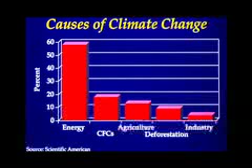And we look at causes of climate change, and we find, as we well know, that energy is indeed the primary contribution. So even if this were not an energy conference, if I were just talking to you about climate change, its dangers, and what we can do to meet it, I'd start talking about energy policy. It's where we are. Okay? So this is out of some publications I've had, and I'll just show you one of them in a moment.

But what we've tried to determine is, on the left-hand side, at what percent of the world's energy use has to start coming from clean, non-carbon energy sources in order to limit the growth, ultimately, to 550 parts per million of CO2. Now, there have been all sorts of work around that as to different policies. That's what all those little colored things are. I did superimpose the U.S. policy. There it is. So you realize that the United States has no policy. It's not doing anything whatsoever to contribute to setting a limit.

So let's look at this picture again, and let's look at it this way and try to make it easier. The green line says, well, it's a little hard by 2010 to get going as fast as we want to. So let's consider 10% renewables by 2010 and 20% by 2020, and then get up to 50% by 2050. And that is the target that's been adopted by the European Union now, that's been adopted by a number of states and cities, because it's so easy. The 10, 20, 50 target: 10% by 2010, 20% by 2020, 50% by 2050.

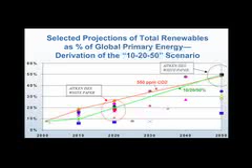The reason I'm showing it to you is when you see targets like that, people will say you're just drawing these numbers out of the hat. No, you're not. That is the target. The 10, 20, 50 are the targets that can stabilize us at least fairly close to where we think we need to stabilize. Those are real numbers. Okay? And the circles, the most aggressive ones, came out of my own work that I did on a paper that was paid for by the European Union. And I'm going to show you in the next slides why I'm confident that we can meet those aggressive targets.

This was the paper called Transitioning to a Renewable Energy Future. It has its own web page, a little hard to see at the bottom, but it's just whitepaper.ises.org. You'll find it in Chinese, Arabic, Spanish, French, German, and whatever you might like. Try English. All right? And this is what comes out of that paper and some others that I've published this year.

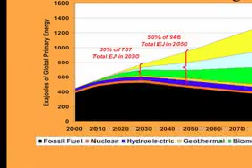And that is, all right, in order to turn that corner for the 10, 20, 50% usage pattern, what does that mean for our energy usage between now and 2100? The black is the fossil fuel use. It says we've got to turn that corner. If nature doesn't turn the corner for us, as Richard is suggesting it may do, we ourselves have to have turned that corner by 2025 or 2030. So now you begin to see why everybody's targeting toward 2030. That also is not a number drawn from the hat. It's a real policy number that's necessary to accomplish this stabilization.

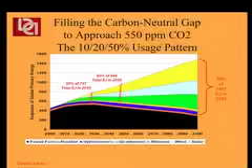And all the colored things you see represent the amount of energy that renewable energy will have to contribute if the world keeps growing on its use of energy. And we assumed a 1.2% annual rate of growth for the world on this, because we don't believe we can level it yet, even though there's no question efficiency, as Richard and Stephen and everyone point out, is the starting point. And so we have to ask ourselves realistically,

can renewable energy be developed fast enough to meet all of those colored lines that you see there and really power a transition even if energy use continues to grow? So here come the practical opportunities with renewable energy. I'm going to dwell first on electricity because it's the easiest to deal with here and has the greatest number of resources. Just to remind you that all we really want to do with electricity, to make electricity, is to turn that generator you see on the right-hand side.

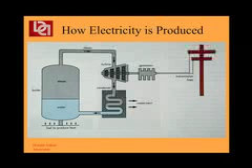That's all you're trying to do. Everything else you do is to spin that generator. So the way we do it with fossil fuels or nuclear, of course, is you boil water, you make it steam, the steam turns the turbine, and the turbine turns the generator. So then we ask ourselves, all right, can we do this without burning fossil fuels? Can we look for natural ways, natural sources of steam or ways to make it?

Well, we've got one just north of San Francisco, the world's largest geothermal power station. The fellow Channel 2 interviewed me a little bit before. I hadn't realized. He's rather new to Channel 2 and he didn't know about this.

The amount of electricity that's created by the Geysers geothermal power plants just north of San Francisco is equal to the electricity that the whole city of San Francisco uses. Now, it goes into the PG&E grid. It doesn't all come to San Francisco. But the point is, that already is a local renewable energy resource which by itself is equivalent to the demand of our major city out here.

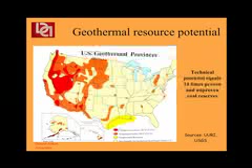It begins to suggest that we've got large opportunities, and indeed if we make a map of it, there are the geothermal resources. People will look at that and say, well, obviously, geothermal's in the west, it's not really going to help provide for the energy of the entire country. But if you look at that resource, the technical potential is 14 times greater than all of our proven and unproven coal reserves. So what you begin to see as you look at these renewable energy resources is the potential is gigantic. Well, let's look on.

You can do what they're doing dramatically in Europe with combined heat and power, making steam by burning biomass energy crops, in particular chipped wood, for example. And our president even mentioned in his State of the Union address, he still can't pronounce nuclear, but he did pronounce switchgrass correctly, and I was amazed he mentioned that. Yes, indeed, we're paying farmers right now not to grow crops on land that's erodible, so they're growing switchgrass to keep the land from eroding.

You can harvest the switchgrass and dry it and throw it into your coal-fired generators. You reduce the sulfur, you reduce the energy content, reduce the coal content, and clean everything up. There are a lot of things we can do with that. Or farmers can grow biomass hybrid energy crops. This happens to be in northern Minnesota. You can plant these crops. These trees take about 10 years to grow.

You cut them about 6 feet above the ground. Another 8 years, you got another tree out of the same stump. You cut it. Another 8 years, another tree out of the same stump. You can get a 40-year crop out of one stump. And it has farmers doing what they know how to do on land that we would not otherwise use for growing food.

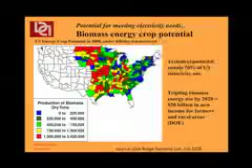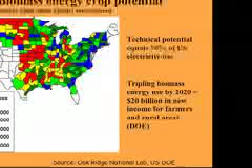So we ask ourselves, assuming we don't want to displace any food land, what resource potential do we have using biomass crops? And the technical potential is that we could create 70% of the U.S. electricity just from the residues on the fields and from the residues in the forests and so on. Again, a huge amount.

Another way to do it, as we just saw out here, there was a nice demonstration actually of a parabolic trough collector which was concentrating on the black pipe that he had out here. You can make bigger ones and concentrate more, and you can go to high temperature fluid. Then the fluid goes to water, flashes the water to steam, and makes electricity just the way we know how to do it. The world's biggest and longest operating solar thermal plant is in Southern California. Its capacity is 1/3 the size of a nuclear power plant. It's been going for 20 years, and there's a magic thing about it. Right in the middle of it is a gas-fired power plant.

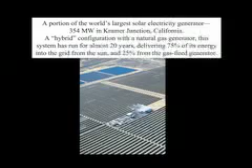The contract with Southern California Edison is that starting at 7 o'clock in the morning, SCE wants their full amount of electricity, whether the sun is shining or not, and they want it flat all the way till 7 o'clock at night. And so what they do is they turn on the gas-fired power plant. As the sun comes up, you back down the gas, and the sun takes over. As the sun goes down, you go back up with the gas, and you have a hybrid marriage between solar energy and gas. And the hybrid saves 3/4 of the gas.

20 years experience has now shown us that the gas only needs to give us 25% of the energy, and the sun will do 75%. When people talk about the transition as, well, we'll stop using fossil fuels and we'll start using renewables, that's not what we're going to do. We use fossil fuels to help power the transition, to help make it more attractive, to level our intermittent resources. There needs to be a marriage with gas to reduce the demand on gas, since we're really not going to be able to meet it, and to increase the value of the solar.

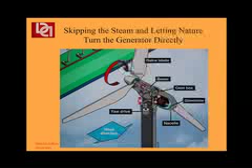Or we can skip all that stuff. Skip all that making the steam. Figure out some way just to turn that generator. And a very nice way is to put those wind blades up in front of it and let them turn, and it turns the generator, and that's not a new technology. And this is not DOE's new R&D program either. This has been around for a while.

No laughs out of that.

That's all right. Previously we used it in order to grind grain and things like that, but now we use it to make electricity. And I don't know how many people realize that California pioneered the world wind industry when Jerry Brown was governor, and basically said, let's go for it. And at the beginning it was a tax dodge, but it got it going, and Denmark picked it up and started making better machines, and all the rest has been history. But we pioneered the world wind industry. That has come a long way.

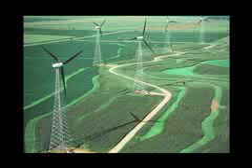The coal industry likes to say the renewable advocates are going to be taking tens of thousands of acres of land out of farming to put the wind turbines in. They actually still write that. They forgot to tell the farmers. So the farmers didn't know that they could go on farming the land, and so they went on farming the land, even though they had the wind turbines.

And in fact, what we have learned, and it was alluded to earlier, is having wind, the annual payments from your wind turbine leases on your land doubles your farm income. It's been a marvelous boon to rural America to help people stay on the farm, because when you have a bad crop year, the wind turbines can carry you financially and enable you to stay on the farm. They've been a wonderful boon.

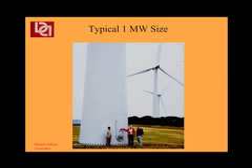So, if you want to get a sense how big they were, this is about the size of a tower for a million watt unit. But the worldwide average now is 1.5 million watts per unit, which will give you enough electricity for about 1,500 families. The only way we knew how to show you how big that is was for a bunch of us to stand by one blade of a 1 megawatt unit, so you get some sense of the size of them. They're huge, but they've been worked out beautifully.

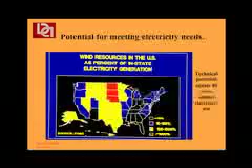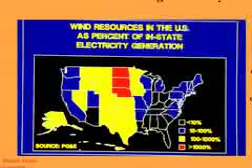All right. Where's the wind resource in the U.S.? It's what we call the Saudi Arabia of wind, which comes down in the red area through the Dakotas and down into Kansas and Nebraska and all down in that area. And indeed, I tend to speak a lot in Canada, and it's sort of fun when I show this slide, because I say I really don't believe that wind starts right at the 49th parallel. I do believe something's going on above that.

And what is the technical potential for that? When the Union of Concerned Scientists did this, we said it's 40 times the annual electricity use of the United States. That number has now gone way, way up, possibly up to 400 times the electricity use of the United States. It's huge. Every resource we look at is huge. And so now we put them all together, and what do we find?

Every state in the Union has in abundance at least one of these major renewable energy resources, and some lucky ones have all four, like California, Nevada, Oregon, and Hawaii. You've got all four. How do you then start powering the renewable energy transition? You start by looking at the resource you have here and tapping into what you have in greatest abundance.

So what do we have in the San Francisco area nearby? We've got geothermal. We've got tidal current coming in underneath the Golden Gate. Very unusual situation, but quite available for tapping energy. We've got solar energy. We've got biomass energy. We have wind energy, but we're not going to be putting turbines along that beautiful seacoast right there. And so we're going to have other reasons for not tapping into all of our resources.

But what you find out is wherever you are, you start developing that resource which you have in greatest abundance. There are going to be then regional interconnections. We already have the Western Regional Grid, which connects us to other sources. And the main thing to keep in mind is not only does every state have at least one, and most states have two or more, but that the abundance of the renewable resources is far more than any state or our nation could possibly need to use. Technically feasible, totally feasible to repower the United States.

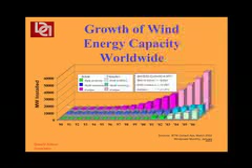So then we begin to ask the question I asked earlier with the model, can we develop this fast enough in order to have the renewable energy transition? We look at wind energy capacity growing worldwide, the world's fastest growing renewable energy resource. The amount installed in the world right now is over 60,000 megawatts, the nameplate rating equivalent to 60 nuclear plants.

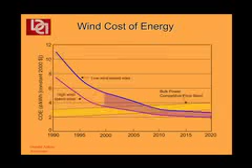What's happening to the cost? As you install more and more things, the costs come down and down and down. It looks like in 2005 maybe you'd begin to cross over, and indeed, it's happening. The lucky wind energy customers of Xcel Energy out of Denver, Colorado will be paying $10 less on average per month than customers who buy electricity from natural gas. That's where we are now, today, with the economics of this fabulous resource. The cost of gas is going up, the cost of wind is going down, and for the people who've already bought into it, we're there. All right? But there's still more.

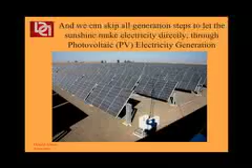So we can skip those generation steps and do what people have been doing in the demonstrations out here and the talks we've had. Let the sunshine make the electricity directly. As you probably know, the sun falls on the solar cell. It is just the physics of the solar cell that it takes the light and electricity comes out of the other end and nothing wears out. If you make the cells correctly, and we're learning how to do that, and protect them from the weather, 100 years from now they should work as well as they do today. All right? Well, how about the availability of that?

The total area required for a PV power plant, when we did this little thing, is 100 miles square in southern Nevada; at 10% efficiency with solar cells, it produces electricity equal to the needs of the entire United States. Now, you're not going to do it that way. Instead, each state needs on average 1/50th of that to be energy independent. And you start looking at the roofs of the buildings and you say, my goodness sakes, we have the land. Okay. And so we let our building surfaces be our solar electric land for a variety of reasons.

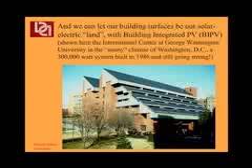This I like to show because it was done 20 years ago. It's not in Arizona, it's in sunny Washington, D.C. And it's a 300,000 watt system. It's 20 years old. People keep asking how long will these things work. Well, we keep showing our older and older ones so you can see. But it's the perfect utility customer, because when it is hot and the air conditioners go on in Washington, D.C., and the utilities get hit with that very expensive peak, and they have to turn on the gas-fired peaking generators, not for this building. This building runs its own air conditioners. It's the perfect utility customer.

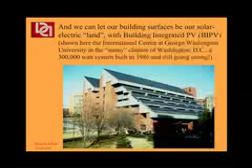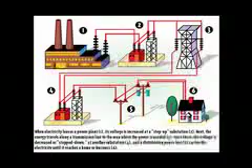Well, we saw before, and Stephen talked about it too, in particular, how complicated it is. It isn't just the generation of energy, it's getting the energy to our end users, to our homes and buildings. Wouldn't it be nice if we could do away with everything you see there and just pay attention to where we want to use the energy and have that left over? And of course, as we've heard, that's exactly what we're doing.

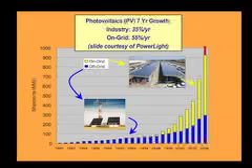Oh, this is in Japan. And you saw this slide before, that they're developing the solar home certainly at a very fast pace. And indeed, back to our question, can we develop these resources fast enough to meet our needs? The answer is yes now with wind, and it's yes now with PV. Both are growing on a pace to meet those colored curves that we showed you earlier that we have to meet. Well, that's terribly exciting.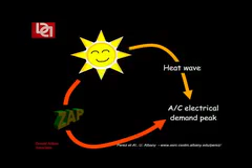Well, what happened was this. There was a heat wave, a big electrical demand, and what I generically call ZAP. It's not exactly a scientific term, but you get the idea. It actually only took out one or two lines, but then it led to a cascading effect. And the cascading effect happened because everything was interconnected through this massive system. And so it took out this massive system.

Now we look at what we have. There's New York City with no lights on. There's the transmission line. There's all the feeder lines going in. Everything's off. Let's ask hypothetically, what would it have taken if we had put photovoltaics on buildings scattered through that region that went out?

The first thing we saw by looking at satellite photographs is that it was during the daytime in the entire region. All of the states in the U.S. and the area in southern Canada that went out were in the bright sunshine when this happened. So we ask ourselves, might it have been prevented with PV such that if the sun comes out, maybe New York City could have stayed up?

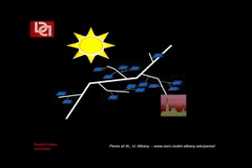And so Richard Perez at SUNY Albany did the calculations and said, yes, indeed, if we had had 300 megawatts of distributed generation through the buildings, through that multi-state region, it would never have happened. Well, we have to ask ourselves, what will it take then so we can have that kind of security in the United States? Well, 300 megawatts is what Japan installed last year on its houses.

300 megawatts is what Japan is installing this year in 1 year in its houses. 300 megawatts is what Germany is installing this year in 1 year on its buildings. So what it tells us is the two nations that are really leading the world right now, having taken seriously using PV on buildings, are now well along towards stabilizing their grids and providing the kind of security. We have a long way to go. But it does show you an actual fact. The numbers we need are attainable numbers and are being realistically attained today.

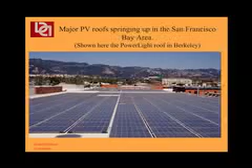So we see it all over the Bay Area. We're certainly doing our very best. Powerlight's contributed a great deal to it. We've got some private people. I have a former student of mine who owns Ace Hardware in Palo Alto. Just went back and put PV on the roof and gets 90% of his energy. We're finding them all over the place.

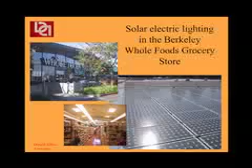This is not net metered. And all of the lights in this Whole Foods are DC operated by DC ballasts. The result of that is when you have a power outage, all the lights stay on. And so when we had a blackout in Berkeley, Barbara and I went running down to the store. We thought it was really great. And there we stood looking through the glass doors while they waved at us and said, sorry, we can't open the glass doors, AC. They were powered by AC.

So there was a wonderful cartoon series for years called Unclear on the Concept. And this is a good example of it. Make it so the doors can open and then it'll work. But anyway, it was quite remarkable to see that. Okay? We're getting government buildings and how important that is. We've seen that we need it for the security of our governments.

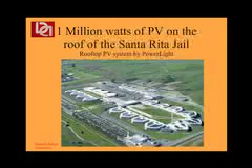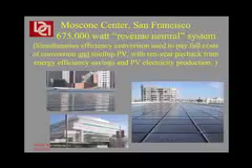And very, very large systems, giant systems, million-watt systems going up now around in our own counties. Here we are in San Francisco, of course, with the Moscone Center. And the remarkable thing about the Moscone Center, as we heard a little bit earlier, is it's revenue neutral. They went in with one contract to the Moscone Center for energy efficiency conversion. And San Francisco fronts the money for the energy efficiency conversion and putting the PV on the roof. And the energy savings from the efficiency will buy the PV. At the end of 10 years, San Francisco has all of its money back and it recycles the money.

So this begins to show how communities can begin to recycle their money if you look at a picture a little larger than just installing a PV system. Look at the operation of the buildings. Look at opportunities for saving money through efficiency, where you should start anyway.

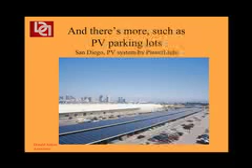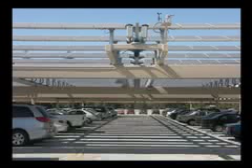Okay? PV parking lots are becoming ubiquitous right now. A building that I designed, I'll show a picture in a few minutes, at De Anza College in Cupertino. And this is also De Anza College, that as long as our building was going up, why not convert the parking garage and put 240,000 watts of PV in the parking garage as well. So there's a community college, using community college funds, that's already starting some of the conversion.

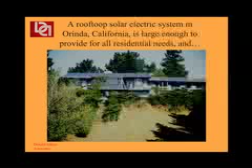If you want to know what is the potential of PV on roofs in the Bay Area, here's an example I always love to use. It's in Orinda, California, 4,500 square foot home, 12 kilowatts. It's a lot of PV. But that covers 3/4 of the south side of the roof, which is what you see there, which is only 3/8 of the roof, right?

So 3/8 of the roof in Orinda is enough to provide all the electricity needs for the house and both electric cars. Now, his wife had their EV1 out at the time, so I sneaked mine in to take the picture, but nevertheless, 3/8 of a roof in the Bay Area is enough to provide electricity for a house and 2 electric cars.

And Steve Heckeroth and I both take issue with the statement we heard earlier that it's going to be very difficult for solar to replace transportation. It depends how you look at it. If we get serious on the very things that Steve was talking about with electric cars, electric plug-in hybrids, and get that PV up on our roof, we're going to find solar contributing in a major way to our transportation needs.

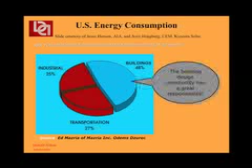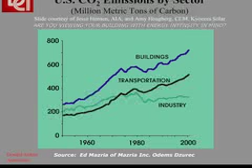Okay? But we're talking about buildings. Let's look at buildings. Because of U.S. energy consumption, almost half of the energy in the United States is used in buildings. My goodness, we should pay attention to that. And when you look at CO2 emissions, it's even greater. Transportation and industry both contribute a great deal to our CO2. Industry around 22%, transportation around 26%, buildings 50%.

And it's the most unsung part, or a misunderstood part, of all of our conversion. We keep talking about gadgets and widgets, cars, and generators and things like that, without realizing that the users, like buildings, are the most accessible, the easiest, the least expensive, the quickest conversion opportunities that we have. So we begin to look at simple opportunities.

Passive solar heating: if you're smart enough to face your house toward the south, you can save 40% of your energy needs, which is 40% of your natural gas use, anywhere around these areas. Piece of cake. Doesn't cost anything at all. Just pay attention to where you put your windows.

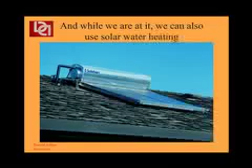All right? We heard a little bit before about solar water heating, which used to be important and needs to become important again. And I combined the two. The first building I designed in this area was the new library for San Jose State University. It was in 1976.

We didn't have much affordable by way of electricity then. And the natural climate in the Bay Area is so wonderful, you can cool it with nighttime ventilation. And so I went up and I thought, aha, I have now shown, 30 years ago now, I've shown the way, and this is going to blossom. It didn't blossom because it's such a different way of doing things. But for goodness sake, if you wonder about the potential, there it is.

So we have other ways of using solar. On commercial buildings, it gets pretty hot to let the sun shine into offices. But you can diffuse it and you can shade it and bring it in as daylight. And a world-important example built 20 years ago was Lockheed Missiles and Space in Sunnyvale. And Lockheed's so famous because they throw the sun, the daylight, 90 feet. And daylighting design is my own architectural specialty.

What benefit do we get from that? Well, Title 24 is a pretty stringent energy standard for the state. We can beat that easily by 40 to 50%. For economic reasons, we only beat it by 40% with this building, and then we turn on the PV, and the PV now is only 30 kilowatts. Originally, it's going to be 100 kilowatts. We didn't get the funding for the whole system. It's actually 36 kilowatts DC.

But even with that PV system, we're saving 60% of the energy of that building now, compared to what it would have been otherwise. This is what we know how to do. This is what we can afford to do. This is what we are doing. There's no reason we should ever do anything other than that.